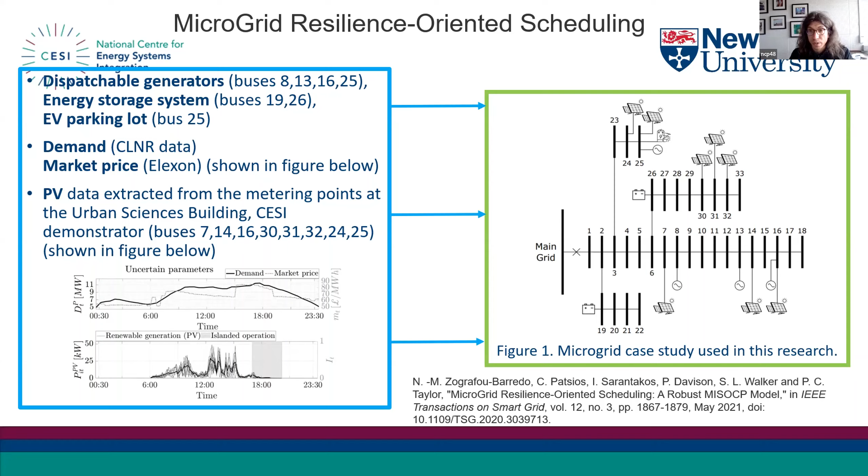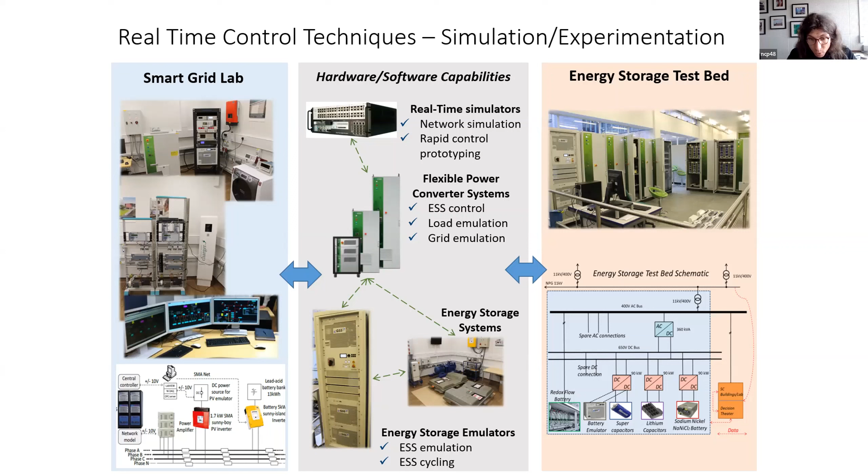We've also used experimental facilities included in our demonstrator base, like the Smart Grid Laboratory and Energy Storage Testbed, doing things like testing real-time control techniques, putting into practice the control and operations we were modeling in CESI, and trying to prove that they actually work in a physical, laboratory environment.

We've done research publishing papers on things such as frequency response services designed for energy storage, where we've tested different energy storage systems in terms of their capability to perform a network service, providing hopefully useful insights to regulators and designers of network services.

So we critiqued some of the important services that existed when we started this project, like the enhanced frequency response service from National Grid.

We've expanded this work to include other assets, trying to combine, for example, hydrogen and gas networks with electricity networks, testing real-time control loops in laboratory environments, and trying to inform the feasibility of using assets like hydrogen to couple different networks together and study the response of these devices.

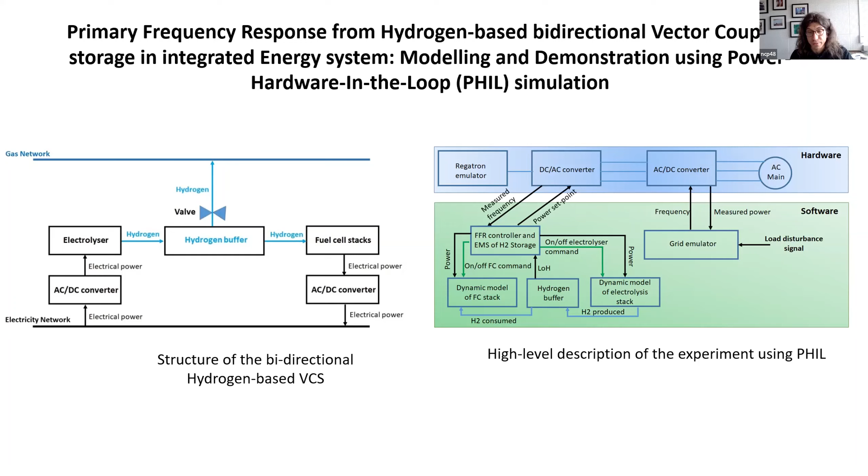All this work has also created a legacy, this experimental work, and we've collaborated not only in CESI but with other EPSRC projects, building on the know-how that we've developed.

This is an example, a link with the manifest project led by the University of Birmingham, where we've taken these control techniques and processes and tried to combine and orchestrate coordinated control across distributed storage systems, online testing the coordination between different facilities across the UK, like Sheffield, Oxford, and Manchester, equivalent systems and labs such as ours.

This network capability was also communicated and inspired good research with strategic partners such as Siemens, and Ian will be talking to us later more about these things. This is a good example, the MindSphere application center established across Newcastle and Sheffield.

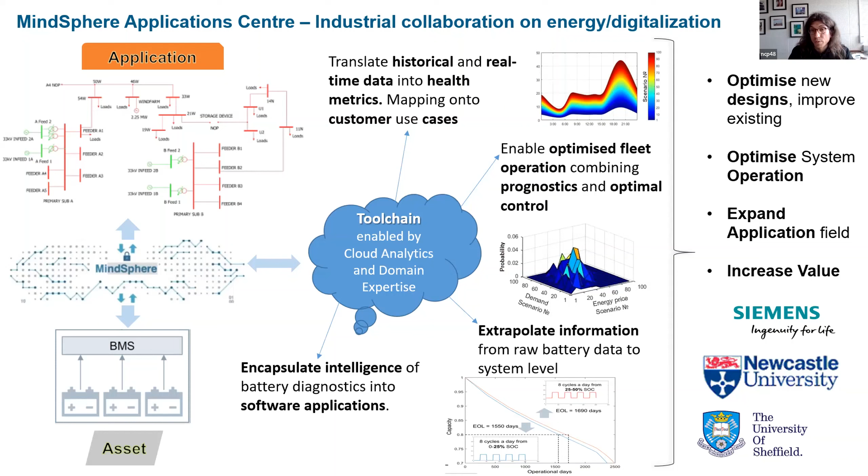Drawing from this experience and learnings to develop tool chains enabled by cloud analytics and domain expertise, drawing data from networks, actual battery management systems for example, and testing optimized fleet operation, informing the operation of energy storage assets to make them more efficient and effective when connecting them to the network.

Work such as this with Siemens has also been upscaled lately and inspired new projects. We've had during CESI quite a few new projects emerging from these collaborations.

Again, on the area of digitalization with Siemens, drawing new partners in like the Connected Places Catapult, the Port of Tyne, and the Northeast LEP, instrumenting the Port of Tyne into a digital hub, and proving that these kinds of multi-vector ecosystems and environments can benefit a lot from new or newly applied solutions.

So we've shown quite impressive benefits in terms of numbers when digitalization or data collection comes in and informs this kind of coordination across different assets and different energy vectors.

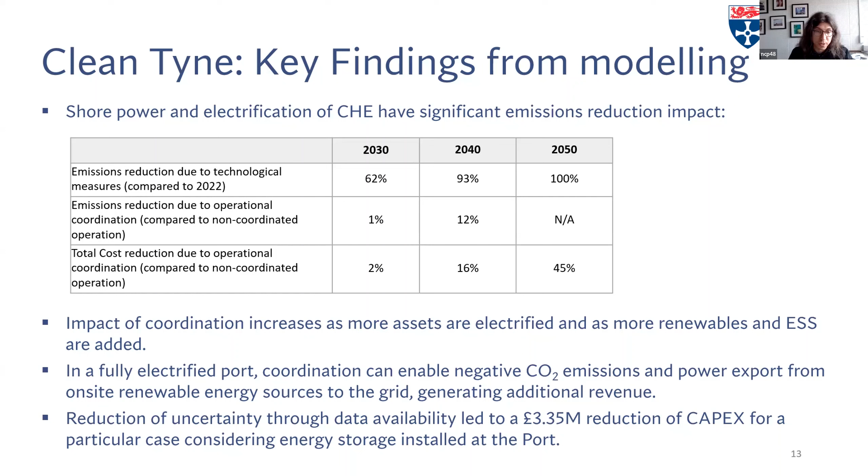And we haven't only tested and used technical solutions, but one important piece of CESI, and I think quite an interesting thing, was collaborating with social scientists in the team on this kind of socio-technical aspect.

This is a good example of a project like that, led by Professor Simone Abram from Durham University. This is actually a slide from her, not my slide, which we've shown in previous CESI events.

The idea here is, rather than switch off a wind turbine where there's no load, what if we were to use the power through an electrolyzer? And then, how would control rooms of different network operators, gas and electricity, behave to be able to do this and support these kinds of operations?

So as well as regulatory and institutional issues, we've looked into control room cultures, routines, expectations, and norms in different rooms to see how these might affect future integration.

Taking a stepped approach, looking into regulatory and institutional reviews, control room observations and interviews, we had quite a lot of discussions and interesting learnings coming from Northern Gas Networks and Northern Power Grid, then simulating things using our CESI models and doing a systematic study design.

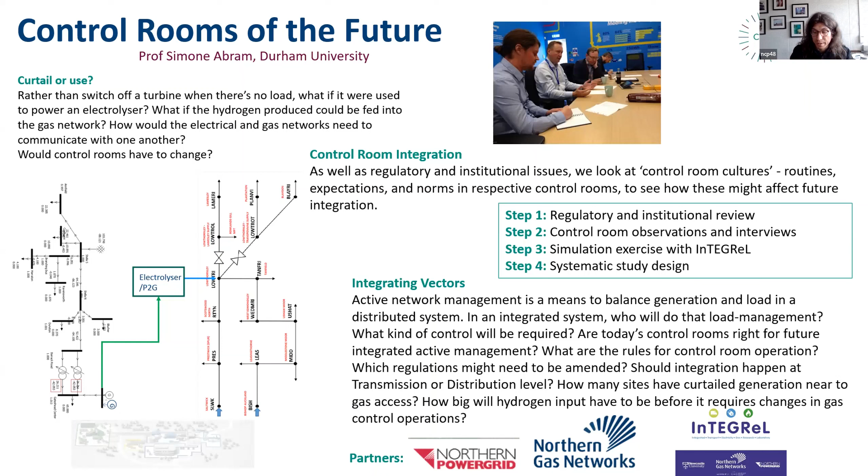And while we're on sites like InTEGReL, another important demonstrator is the Newcastle Helix, and some of you will hopefully physically come on Friday for the final dissemination and close down event, so you'll have the opportunity to look at these sites, go to InTEGReL as well. I think this is scheduled for the day.

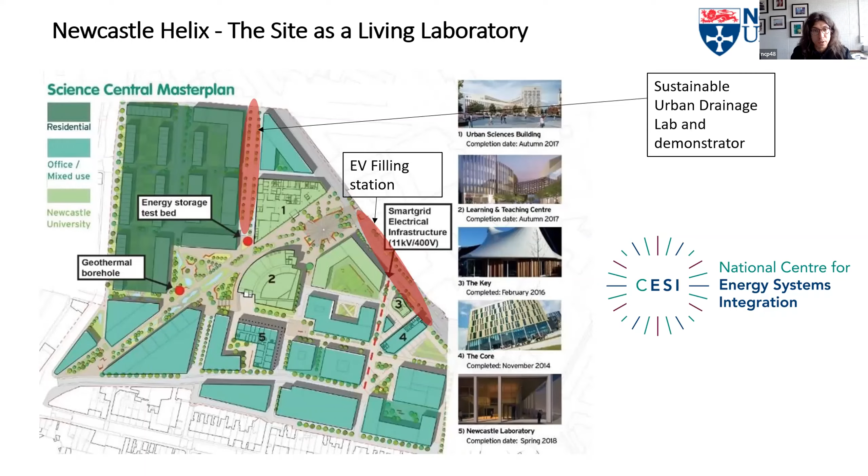And here we've looked into these ecosystems as living labs that provide us with data, but also we are using them, as I said, to validate and inform our models. And work that has happened in collaboration alongside CESI, led by Professor Sara Walker, who's also leading CESI, is this

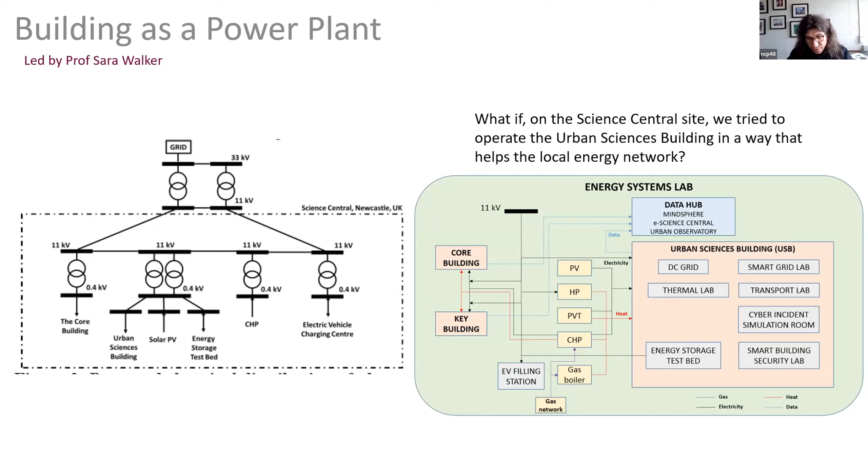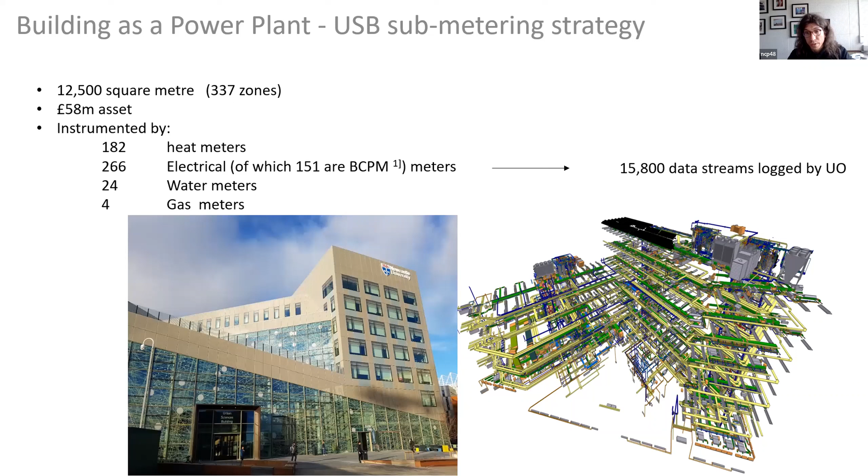building as a power plant, where we investigated the capability or the capacity of the building, the Urban Sciences Building at Newcastle Helix, to perform demand-side response. So we've used a lot of data coming from this nice and new, but even more back then, just opened building. It's a £58 million asset with a lot of heat metering, electrical metering, water metering, and gas metering, up to 15,000 roughly data streams logged. And we've used that data to assess the building's capability for demand-side response.

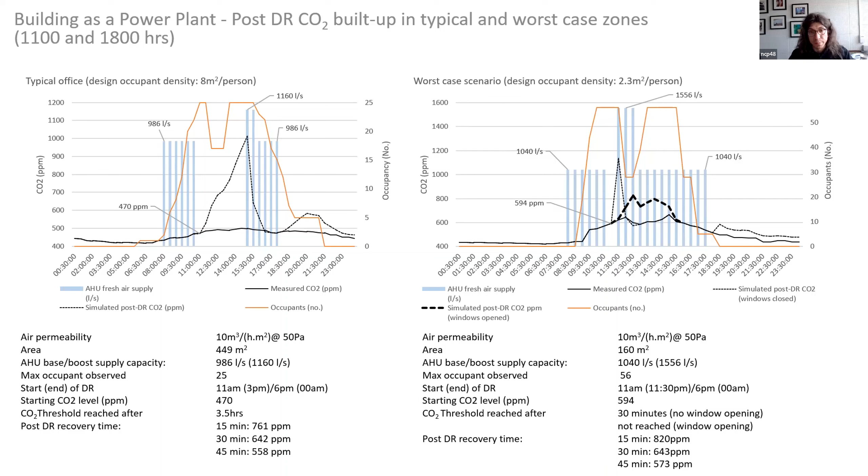So, for example, using different times in the day to change the way fresh air is supplied, and testing the capability using deferrable loads such as heat pumps, for example, to perform demand-side response. So we've changed the way, if you like, the building is behaving, hopefully to provide some network services. And we found interesting things, like there's quite a lot of possibility, a lot of potential in a building without really doing too much interference to provide demand-side response.

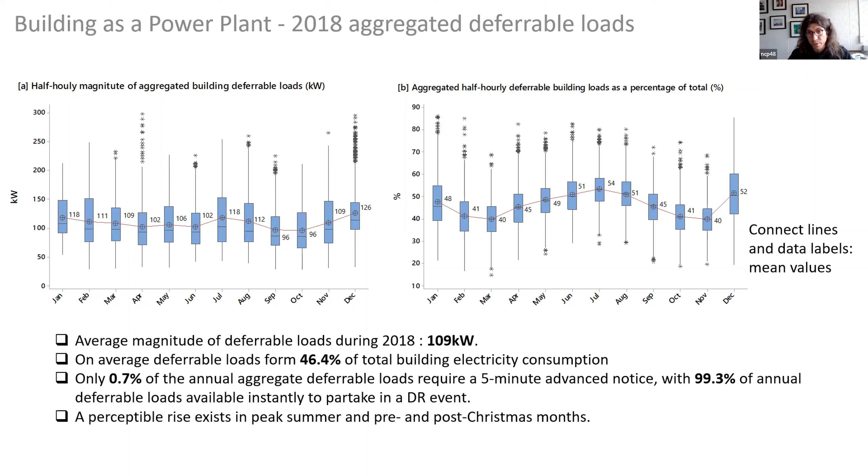And on average, we've measured that deferrable loads for this particular building formed around 50% of the total building electricity consumption. And most of these, up to 99.3% of them, are available instantly to partake in a demand response event. And of course, things are different with different seasons, but it shows the potential of a single building to provide demand-side response. So of course, this is not enough for the network, but the prospect of aggregating different buildings to provide a coordinated response has been quite interesting, and something that we would like to continue working on, especially given

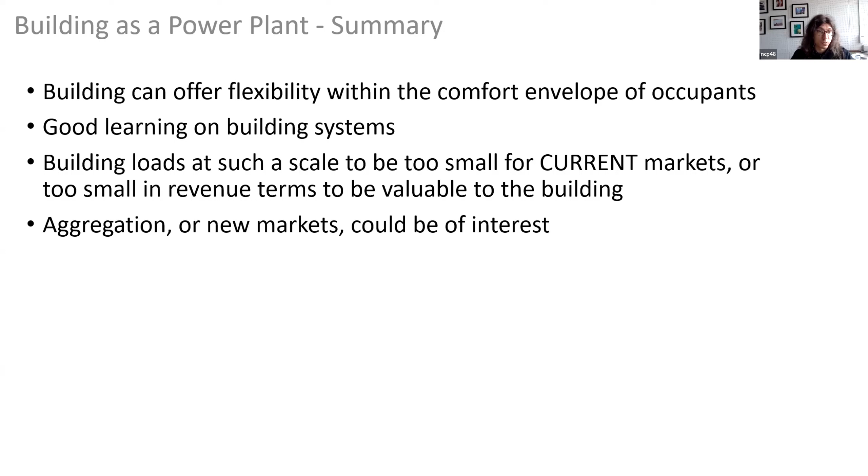the fact that, for example, the BMS provider for this project is Siemens. So we've had several discussions around interesting things we can do together.

And finally, going, if you like, a level up from components to system, and now to whole, and then to site, and then area, if you like, geographical areas. We've done analysis of things like a more expanded geographical area, including gas and electricity networks. So this North of Tyne project, looking into a wider area around the InTEGReL site at Low Thornley, at a

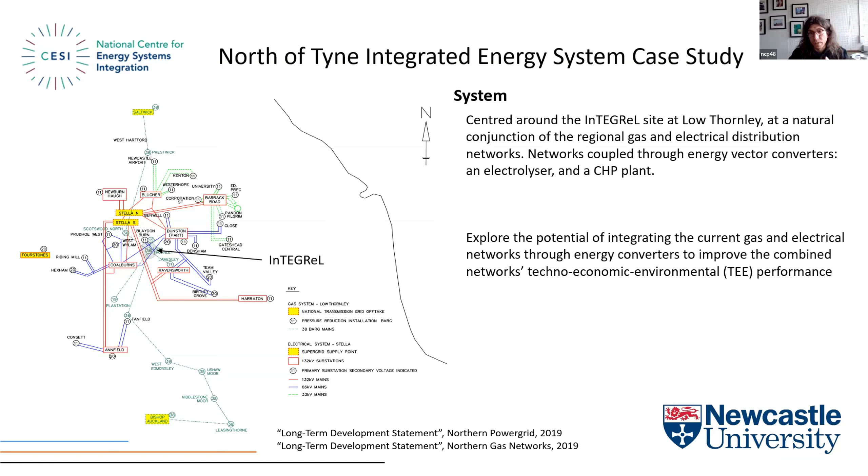natural conjunction of the regional gas and electricity distribution networks. So we've tested the potential, explored the potential for these networks to be more widely coupled, if you like, hopefully to improve the combined networks' techno-economic and environmental performance. So we've drawn scenarios. We've used this kind of sites, these demonstrators, to inform scenarios around energy system integration and heat decarbonization. So we've drawn different potential futures, if you like, changing things like keeping business as usual in the area, or assuming increased electrification and insulation with or without systems integration.

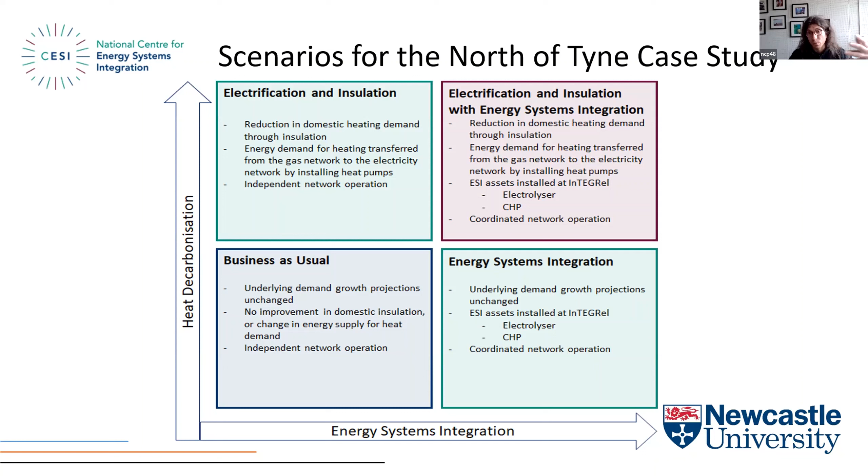And we've tested different scenarios, and we've come across problems, real problems that we've got when we try to actually use this real data coming from different sources, different networks. And we've had to go through a quite tedious but still interesting process of synthesizing data coming from different sources, different networks, different operators. And we had to use quite a lot of assumptions, or even our models, to inform these kind of load data creation processes. So we found it's not quite easy to do this.

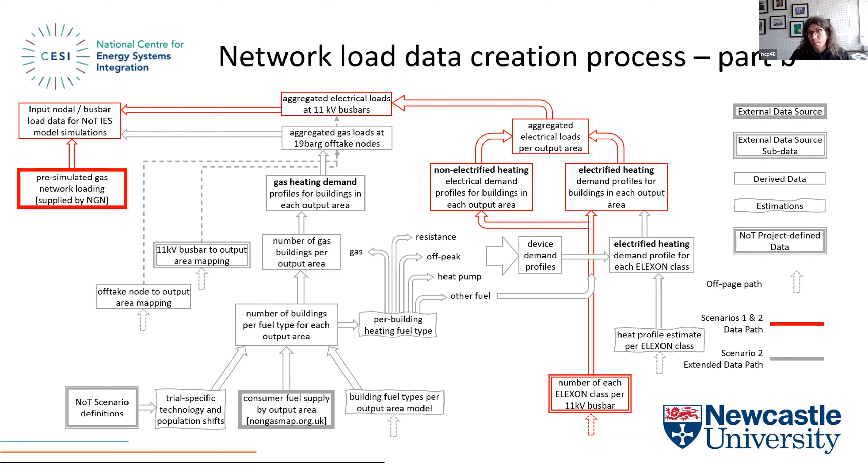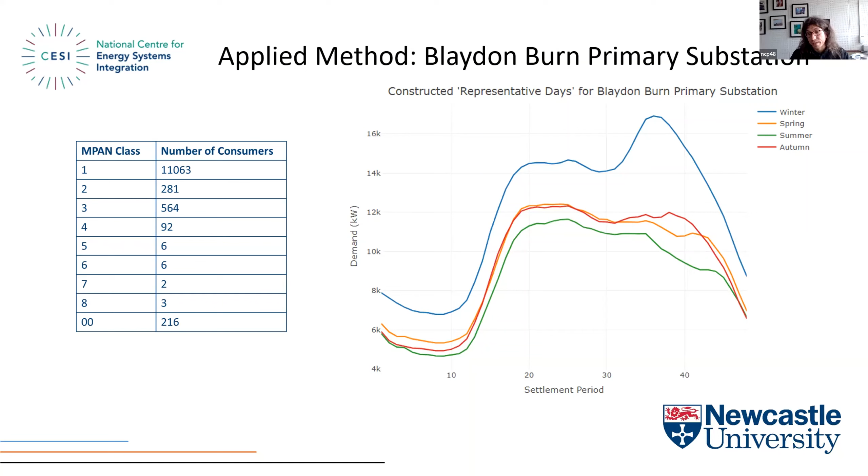And we don't have time to go through all these diagrams, but we can see the complexity of trying to synthesize data to inform these kind of coupled models that we've developed in CESI. And we've used this data and synthesized things like representative days for different substations, things that weren't available there either because the data was lacking, or because we didn't have proper understanding of how these networks would operate in tandem.

And we found that building this complexity bottom up, if you like, which was one of the core things that CESI has done, going from component to system to site and to region, if you like, presents significant data challenges when we try to harvest that data and even combine it, because it wasn't and it isn't being collected for purpose.

However, the answers from our existing models, and models that we've had before CESI, could be dry, if you like, in supporting decision making if not integrated. So in CESI we've done a lot of modeling work that you've seen in other days, and hopefully informed these models from data coming from these analyses and these demonstrator sites. We feel that this demonstration and data collection, data analysis, scenario modeling, and modeling in general needs to go hand in hand, and something we've seen in this particular project is that visualization becomes quite critical.

So I think this is a brief summary of interesting things across the work package. And of course, we haven't worked in isolation - there were quite a few researchers, academics, and industrialists working on this, an entire army of people, that I couldn't really name everyone in this presentation. But thanks everyone for making this journey with us, and hopefully this gave you a brief overview of things we've done around this work package.

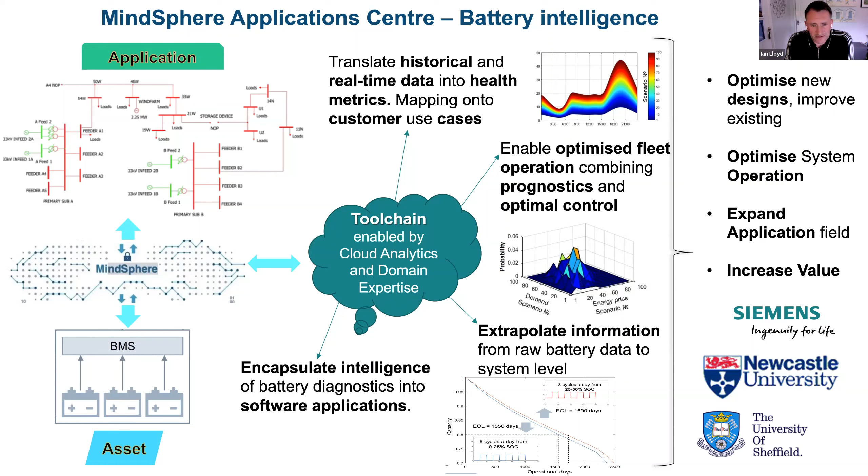So within Siemens, there's a real interest in terms of how we are able to leverage that. We have the Siemens Smart Infrastructure business. We have our own experts in there. We have our core corporate technology portfolio, and then the experts from within the university themselves that were able to take these different types of opportunities and translate them into new different types of products, new areas of interest, and develop new skills and new knowledge to be able to take ideas forward and develop people.

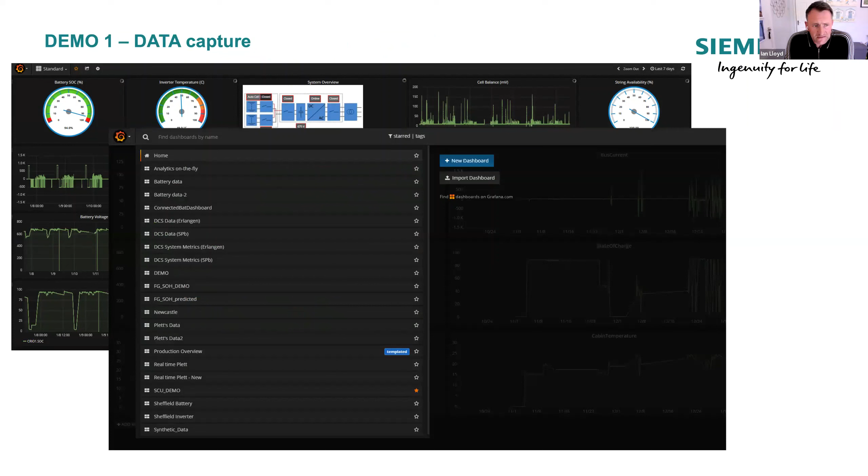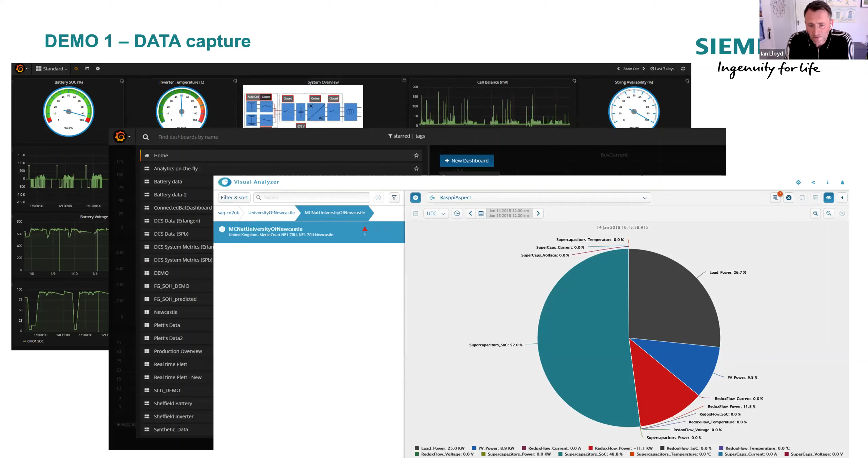So here's just very briefly, in a very short space of time, we were able to develop applications, we were able to connect data, we were able to stream data from different assets, and we were able to develop applications and algorithms to advise about how different systems themselves could become interoperable, how they could interoperate with a building as a whole, and how a building can interoperate as an orchestrated mass with many other buildings across different zones and different sites.

Now, as I shift on, more interestingly and more recently, we've been considering what the level of impact is likely to be, and how the levels of impact of industrial demonstrators have been able to be taken forward. So we've been involved in the Clean Maritime Demonstrator Fund. This is with the Port of Tyne and Connected Places Catapult, Newcastle University, and the local enterprise partnership has been involved, to address the types of benefits that are likely to be achieved from applications off the back of the demonstrators.

That have been achieved within the world of CESI, within the world of Siemens themselves, and then the opportunity to work on the appetite and ambitions for local organisations like the Port of Tyne to embrace decarbonisation opportunities, shifting forward, and how we can adapt the learning we've achieved on other projects to demonstrate how an environment like a port can embed themselves with different types of technology, including renewable generation, energy storage, and a whole raft of other solutions to promote this world of decarbonisation. And then, if it's possible within one port environment, how that can be replicated and transferred to other ports across the UK and across the globe, which is of course a keen interest in terms of the decarbonisation of the maritime industry as a whole.

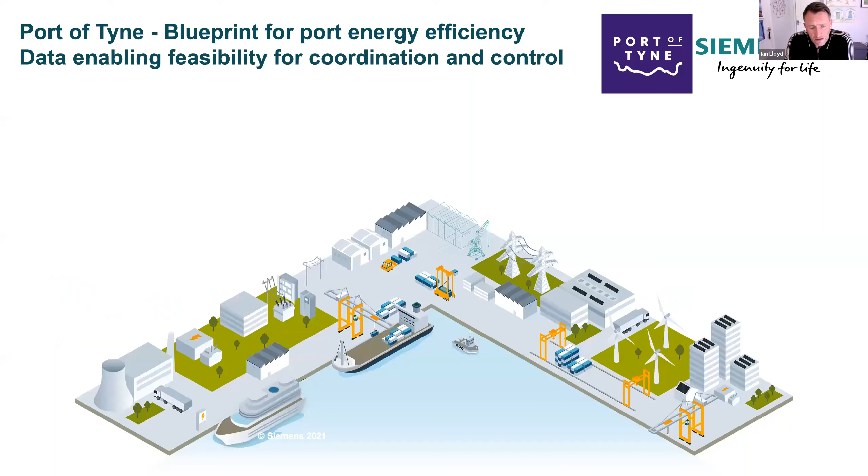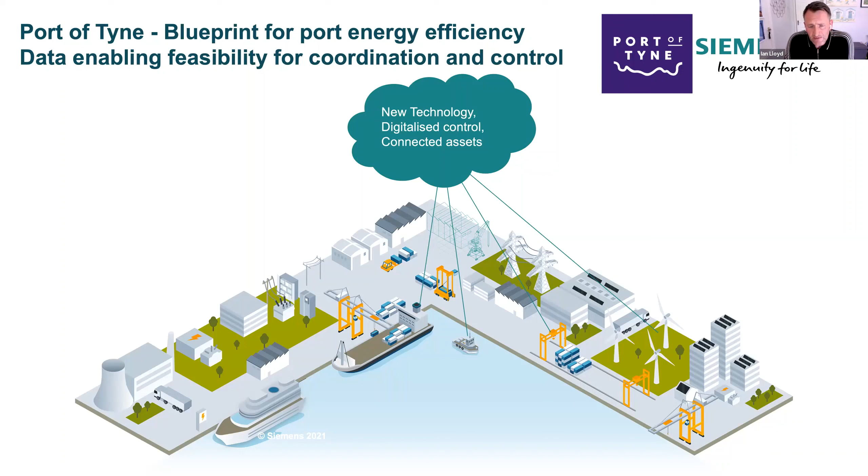So essentially, we started off with this infographic about being able to understand how technology, the different elements of digitalised control, and how connected assets could start to become a hoard of valuable data and information, to allow us to consider the types of solutions that could be applied to control and modulate some of those loads within the facility, and how to secure the data to manage energy in an entire domain that sits on there. But of course, it's not all hard technology solutions and hard processes.

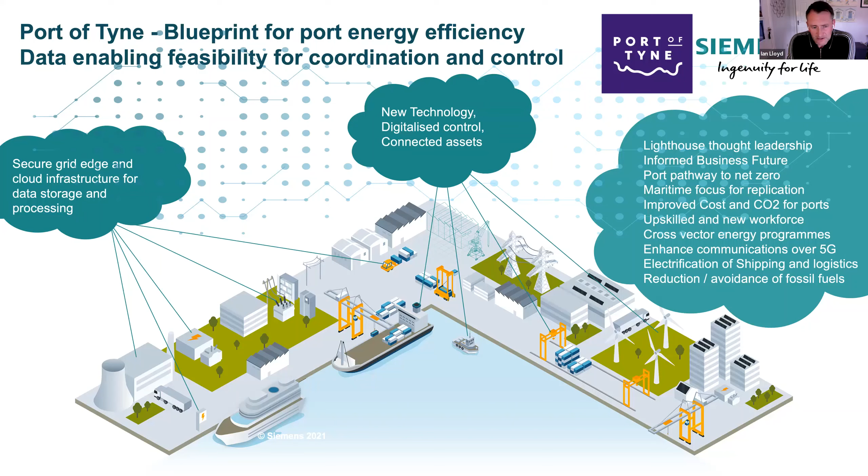There's a number of different opportunities in terms of cross-vector energy management, the ability to defer energy from one source to another, to improve the cost position, the CO2 position within the port environment, to apply ourselves in terms of how we can replicate this elsewhere, how we can regenerate the region being another area of keen interest in terms of the lighthouse of thought leadership and informed business futures. And then also how we can apply ourselves to address digitalization, new skills and new uptakes, really answering the questions around prosperity that could come from the adoption of energy systems and their integration. And essentially, here we are.

It's a large visual graphic here in terms of this distributed energy optimizer platform that we've applied within the Port of Tyne environment. It gives us an opportunity to capture the energy being consumed on the site today, and to consider how those different energy vectors can now become interrelated with each other - how electricity can link to gas, how gas can link to transport, and how the operation within the port environment can be enhanced in terms of using that available data to inform a better future.

Ultimately, we start off with that graphical view I just posted on the previous slide, but this gives us the view about where we are today and the future elements in terms of how we can adopt different types of enabled sector coupling to really drive the benefits across a full port ecosystem, and the intelligent mobility solutions that apply to road, rail, and air freight coming in and out of our very important transport environment that the ports make up.

We started off, of course, with an electrical power environment. This is very frequently the area of primary concern when it comes to constraints, the management of energy, and the ability to balance energy from one sector to another. And then we're able to interlink that in terms of how we can use different new technologies to decarbonize different types of environments.

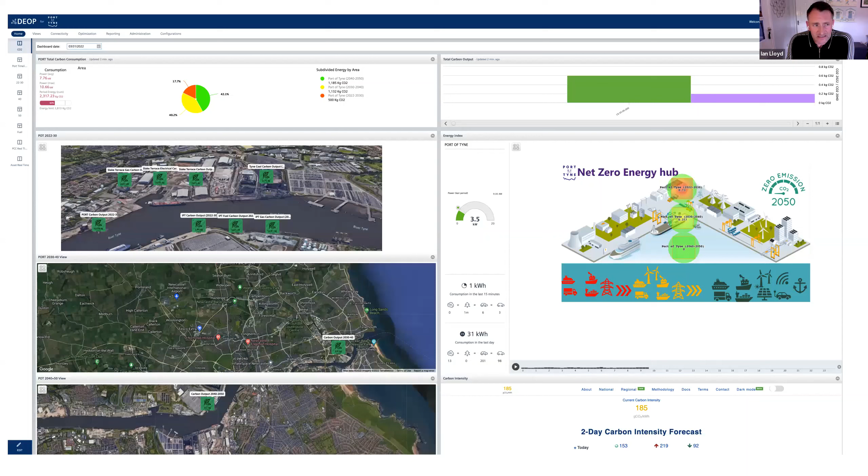The importance really leads us to, what does this mean for us going forward? This is another graphic around the actual platform that's been demonstrated, showing the different types of views that can be created within this digital environment within the port. How data can become a very important element in terms of promoting different technologies, how we can synthesize and simulate how different solutions will play an important role in how the port goes from its state today into a very clean, sustainable state, shifting forward to the future.

And then ultimately about how we can sectorize and create some zonal controls within different types of environments, just to be able to consider. This gives us the opportunity to shift forward and adopt different types of technology, and to select and interplay them around how they can relate into other zones and areas, on both the national and international benefits.

So there's some real clear interest in terms of how these types of technologies have been supported with the work we've done at Newcastle University, how that's been embedded within the key areas of focus within the CESI team, and how these different projects have actually turned into real live demonstrators and living laboratories that give the opportunity for real impact and value to be promoted across the global front of energy management.

And Haris, I think I can hand back to you there now, to deal with any questions and to close off.